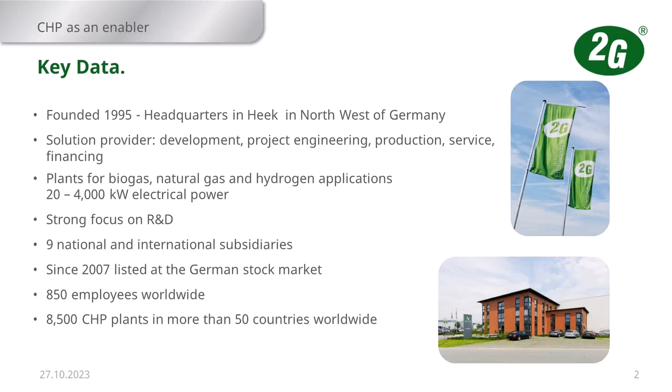The hydrogen engines - we're not ever saying that this is the be-all and end-all, that you've got to build a hydrogen engine and that's going to solve every single bit of the carbon infrastructure or the carbon problems you have. It just fits into a part of the overall strategy.

Building out PV nowadays is just so cheap, and now obviously onshore wind is going to get further along with the planning applications being dropped. We just see hydrogen fitting in as a part of the overall mix. Especially with the excess surplus of electricity, especially from wind farms at night, using that surplus electricity to generate hydrogen is obviously a way forward, rather than trying to build plants just to manufacture hydrogen, which is obviously a different set of mechanics and economics.

A lot of the projects we do over in Germany effectively use the electrolyzers to do grid balancing.

So 30% of all the wind turbines in the world have got to turn out the wind at night because obviously they can still generate power, but there's no demand for it. So rather than paying all the subsidy - I used to work for SSE, so I know about the subsidies that the government pays us to turn the wind turbines out.

In Germany, they use electrolyzers to do grid balancing. So rather than turning the wind turbines out, they make hydrogen. A lot of the projects we work on, we make hydrogen all throughout the night, and then we utilise it during the day. It's an energy vector, an energy storage medium. So rather than employing big batteries, use the excess surplus energy you've got at night to make hydrogen. That's it.

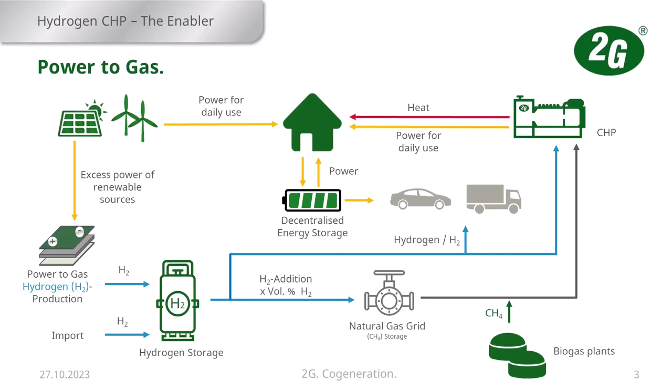So rather than storing electricity - yeah, I mean everything's weird depending on the regional subsidies and everything else. The municipalities in Germany are built so they're effectively their own energy supply companies, all the little villages and everything else. But down in Bavaria, they specifically target selling hydrogen to Greenpeace. So it's like everything - the last slides on this presentation are all about the economics. A lot of times, it's just economics. Cost is driven by money.

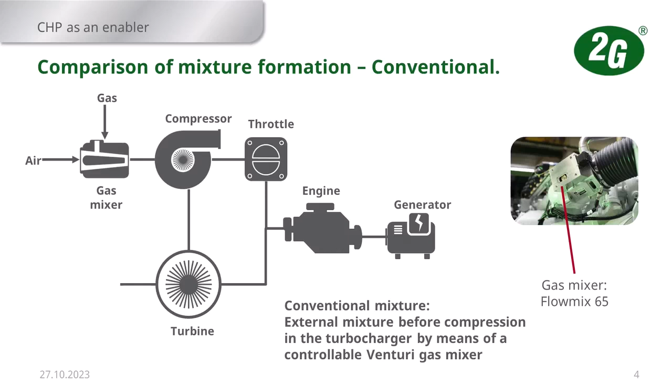So generally, in most standard engines, we use gas mixers. We have a gas mix where we do the formulation or the mixing of the gas in the air before we put it through the turbochargers. And the turbocharger then feeds that gas mixture into the engines. This is pretty much, apart from the non-aspirated engines, how all engines work.

For us, when we design engines, the basic core engine's effectively the same, depending on the gas and everything else that we're using. It's really just messing around with the compression ratios and the timing, and when we're doing the injection and when we're doing the spark effectively into the gas mixture. So we're normally used to playing around between biogases and natural gas, and conversely into hydrogen. It's just effectively getting that compression ratio right and the compression and the timing.

But also, we don't have flat cylinder heads - we have rounded cylinder heads, and we spent an awful lot of time, the research and development team, designing the cylinder heads, so that the combustion bowl is exact.

So this is why the efficiencies of the engines are so high. We spend an awful lot of time playing around with this. A lot of people will say, oh, you'll have flat heads. We don't, it's a slightly curved head, obviously, for that.

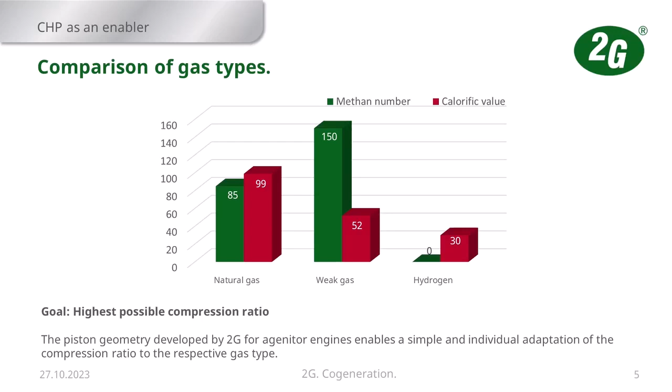For us, it's just a case of, we have the engines on the test cells, and we've got the engineers who know how to design and how to build them. So every time we need a different gas or a different structure, depending on the methane, or how much methane's in the biogas, we just play around with the compressions and the timing ratios of it. And effectively that's all it is. The actual core frame of the engine is exactly the same for all gas types, all gas structures.

Hydrogen is slightly weird, and it's got bad points and also an awful lot of great points. But in reality, our entire development of these hydrogen engines wasn't designed for hydrogen. Originally we were designing syngas engines, and a lot of the syngas structures had more than 50% hydrogen contained within the syngas. The problem with hydrogen is it's got a low detonation temperature, a lower ignition temperature, compared to natural gas and propane, which is just shown for a reference point.

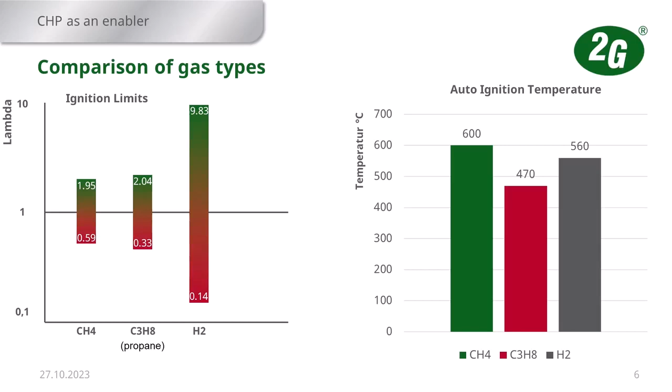Every time we're moving a gas mixture through a turbocharger, sometimes the turbochargers run at a couple hundred degrees centigrade. So when you're moving generally more than about 40-50% hydrogen through a turbocharger, you're getting pretty close to the auto ignition point of hydrogen. So originally, everything that we designed for syngas, or for these hydrogen engines, was based on the syngas. What we found is as soon as we were moving more than 40-50% hydrogen through the turbocharger, we would run the risk of blowing the turbochargers up because of the lower detonation temperature.

So originally, we designed it for the syngas. Rather than putting the gas mixture through the conventional way, we don't put the hydrogen, or we didn't put the syngas, through the gas mixing valve. We were still turbocharging the air, but we weren't putting the gas into it. Then all we were doing later on is putting an injection valve onto the engine, and we were injecting the hydrogen or syngas mixture back into the turbocharged air just in front of the cylinder head.

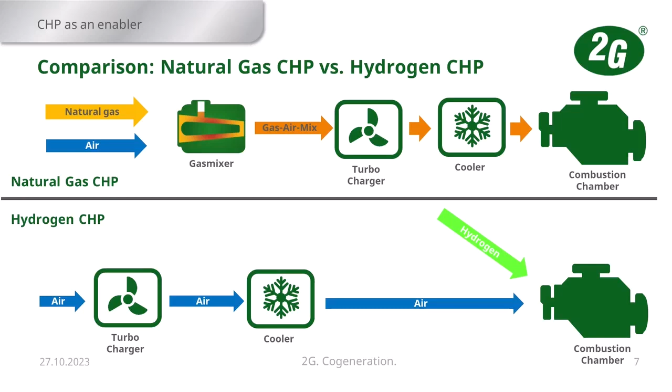So I said, we'd originally developed all of this for syngas, or for these 50% concentrations of syngas. That's all we actually do to the engine, it's just that injector valve. Then about 12 years ago, the German government were umming and ahhing whether to go for the hydrogen economy or whether to back the battery economy.

So they wanted a demonstration project to prove the concept of generating hydrogen from wind farms, low pressure, low temperature storage on site, and the injection back onto the gas grid. They wanted a project done to prove that all that sort of technology could work together. So obviously they came to us and asked if we could design a 100% hydrogen engine.

And in reality, all we did is we took the syngas engine running from 50% hydrogen, played around with the compression and the timing, and made it run on 100% hydrogen. In reality, it didn't take us that long to do. It was just a case of retuning and playing around with the compression and timing of it. And in essence, that's the only thing we add to an engine, an injector valve. Because once again, instead of the turbocharger, we just bypass it. We don't do anything else.

When we were originally doing our third series of engines, we also used to have to change the cylinder liner and the piston head, just so we didn't suffer from hydrogen embrittlement on the materials. When we moved to our fourth series of engine, a couple of years ago, our CEO made the decision, because the engine's lasting 15, 20 years, we know all the natural gas engines, at some point over that life, are going to be running on hydrogen. There's just no other way around it. So now every single engine has the cylinder liner and piston head with that hydrogen materials already specified on it. So now the only bit we actually have to add is that gas injector valve.

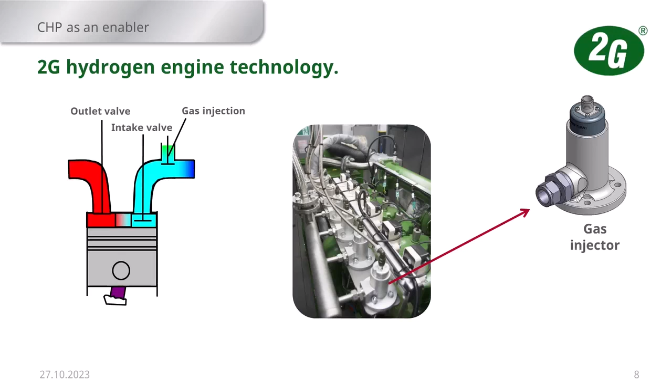So this was the original project - this is the actual engine that's in Berlin Airport. As you can see, at that point we didn't even bother taking the gas mixer off. All the hydrogen engines we sell now that are dedicated hydrogen engines, we don't bother putting the gas mixer on. But when we did the demonstration project for Berlin Airport, we still left the gas mixer on. So if we put the injection rail and the gas mixer on, that engine would run dual fuel - any combination of gases. But the gas mixer is never used because it's purely a hydrogen engine. All the dedicated hydrogen engines now don't have that gas mixer on, but it's just a leftover thing.

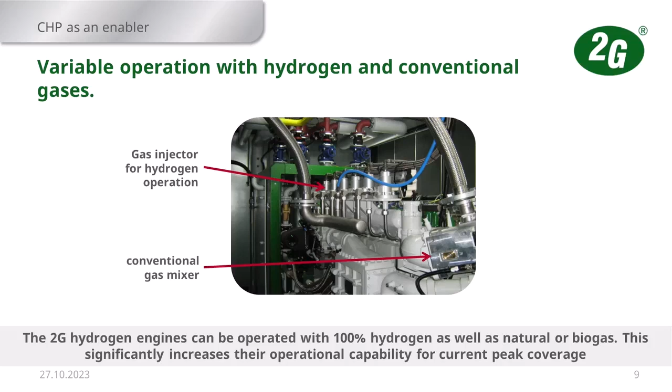The big advantage of this is we can make every single one of our engines run on 100% hydrogen. Because people think you've got to take the engine out, it'll be a new block, it'll be this - no, you put the hydrogen rail on it, that's it. So people aren't buying assets that will be dead if we do transition to a hydrogen economy or a gas network with hydrogen in it.

You get a bog standard engine - it's only because of the issue with the turbocharger at 40% blending that we start adding gas injectors. The normal natural gas engines, straight out of the factory without doing anything to them, will take 40% hydrogen, doing nothing to the engine at all. You could run a blend of 40% hydrogen and the engine doesn't care. It's only the turbocharger that has problems with higher concentrations of hydrogen. So the idea that we're only going to get 20% hydrogen in the gas grid - not an issue at all.

One of the other things we did as a company several years ago - the gas grid in the UK normally has a methane content of over 80. The only issue when you start blending hydrogen into natural gas is you lower the methane number of the gas. At 40% concentration, you're basically down to about 70-72% methane content compared to 80% as normal natural gas.

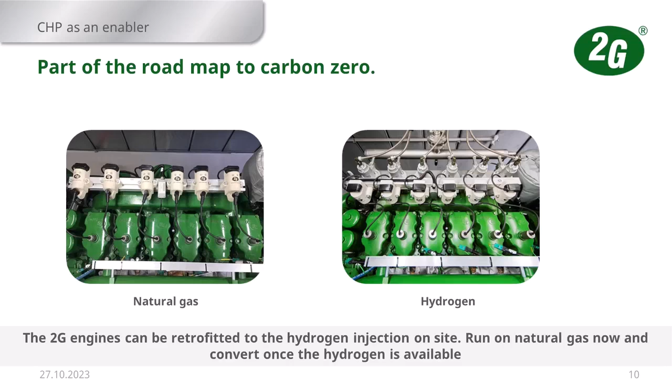One of the issues with hydrogen is the energy density. It's 3 times less energy density compared to natural gas, so we're shoving an awful lot more gas through the engine than we would through natural gas. We run at higher pressures - normally on the natural gas engine we're only running at a couple of hundred millibar, but when we're running hydrogen, we're running at 4 bar. So we shove hydrogen through that engine quickly.

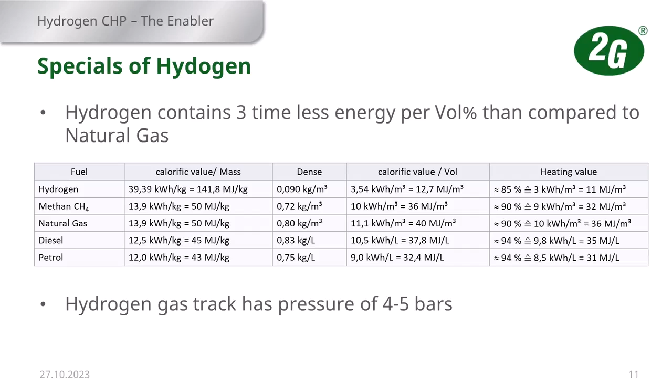It's all development work we've done already, so everyone now is playing catch up with us. We're open about all of this because we have a team of nerds who just design all these things constantly. Hydrogen has got some issues compared to other things we're working with, and energy density is one of them.

One of the great things about hydrogen is its combustibility. Normally with natural gas and everything else, we work on operational windows - there's a lot of gases you have to mix with air to get them to combust, but there's a limit to how much air you can inject and still get ignition within a spark plug, which is called the control window. With hydrogen, it's massive - it's got an absolute ginormous control window, so we can mix an awful lot of air in hydrogen and still make it go bang in the cylinder.

The reason this is really handy - when we first did the engine at Berlin Airport, we based it on the German biogas specification. When we designed an engine 12 years ago, we thought, what specifications should we pick? They chose the German biogas specification, which was 500 NOx. Since then, because of the corporate world going green, a lot of these engines are going to go into city centres, so the engine now all runs at 95 NOx. And we did nothing to the engine except increase the lambda value.

So what we did is shove more air into the hydrogen, and we still have it go bang, but by increasing the control window, increasing the airflow ratio of the gas, we lowered the NOx from 500 to 95, with no change of efficiency or power output of the engine at all whatsoever. We know we can go even lower - at the moment we're running about 3.4 on the lambda value, and we know we can get down to 5 or 6. The problem is when we start hitting these numbers, we start eating into the power output of the engine. But we know we can actually run the engines down to 30 NOx.

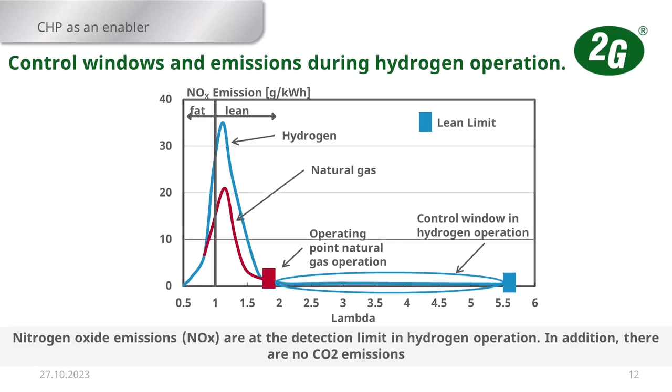So I said, for us, hydrogen's wonderful as a fuel. And once again, our entire range, all of them, we have running on hydrogen, so our 4-cylinder all the way up to our 20-cylinder. We've also recently just launched our 16-cylinder as well, that fits in the middle of that.

But the efficiencies and everything else, they're all the same as they are on natural gas. The only thing at the moment, well, not the actual efficiencies, but the power outputs - at the moment, because we've only got 26 hydrogen projects working all over the world.

So at the moment, when we're running engines on 100% hydrogen, we derate the engine 25%. The reason we're doing it specifically is hydrogen's got no knock resistance, so it's easy to get early detonation if you get the combustion and compression ratios wrong in the engine. Because we've only got 26 projects working all over the world, we want to make sure there's no issues on those engines at all, so we derate the engine 25%.

So that's why, on our 420, which is our 20-cylinder engine, when we run that on natural gas, we run that at 1 megawatt.

But we specifically made this decision because at the moment, up until the next couple of months when we're doing the testing of the engines, we're still using bottled hydrogen in the factory. So we haven't got the engines on test 24 hours a day. But we're going to be on the hydrogen backbone that's going through Germany - our factory's going to connect to it. So as soon as our factory's on it, we're going to get the engines on test 24 hours a day.

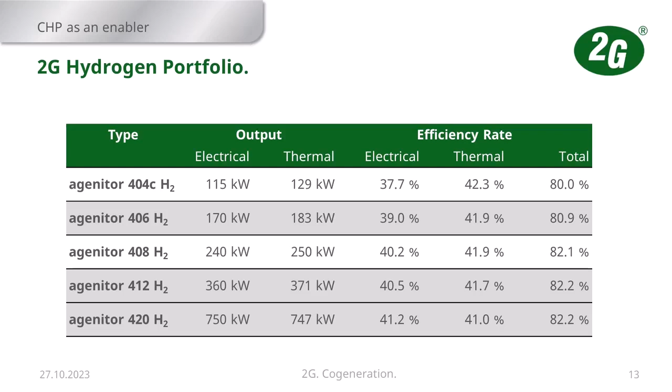What do people do with the heat? Is that a bit of a cheat, saying you get half of the engine?

No, I'll show you one of the examples. Because this is what we build - we're a CHP company, combined heat and power. So obviously we do what we class as low grade, it's 100 degrees.

When we, as a company, are targeting industries, the best industries to work in is the food industry, because they have high steam demand, high low temperature water demand, obviously for washdowns and everything else, high electrical demand, and generally they run 24 hours a day.

Every hospital has got a CHP. Every university's got a CHP. Anybody's got high thermal base loads or high heat loads, like swimming pools, hospitals, those types. Yeah, absolutely. Well, we did the world's first district heating, you'll see that in a minute as well. But yeah, everything's got high heat load, high electrical load.

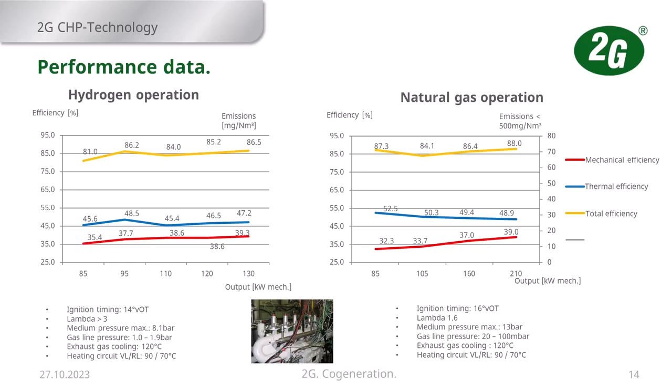So once again, I said, we spend an awful lot of time doing this sort of research and testing and everything else. And obviously we have a lot of universities come down and witness all the testing, because pretty much we're the only people that go running the engines. So obviously a lot of the universities in Germany have got high interest in everything that we're doing. But yeah, so I said for us, hydrogen's just wonderful as a gas.

I said most of these, I've got the case studies in a minute. Kirkwall Airport was the first one in the UK. That's got the ITM electrolyser on Eday. And Toyota have got them at their main manufacturing sites over in Japan.

I mean, the most interesting one that we've done recently is over in Taiwan, at one of the semiconductor factories. The byproduct of the semiconductor factories, they're reprocessing, and the reprocessing of the waste produces 99% purity hydrogen. So it goes straight into our engines, and the case study on that is fantastic. And there's a lot of people watching that now. But yeah, so we've got them everywhere.

I said this isn't something that we've just got on the whiteboard, saying well, this is what we're going to do in the future, this is what could be done. We take people to see these. And the crazy one is, I said, the one in the UK, which is Kirkwall - it's actually always quicker.

We take everybody to see Apex over in Germany, because it's actually quicker to fly into Germany than it is to get to Kirkwall Airport. I keep trying to convince people to come see the one over in Dubai, but so far no one's taking me up on that. The one in Dubai works absolutely sweetly. I've seen the one in Germany God knows how many times. But I must admit, the gin distillery up in Orkney is fantastic. It's just an absolute pain to get up there.

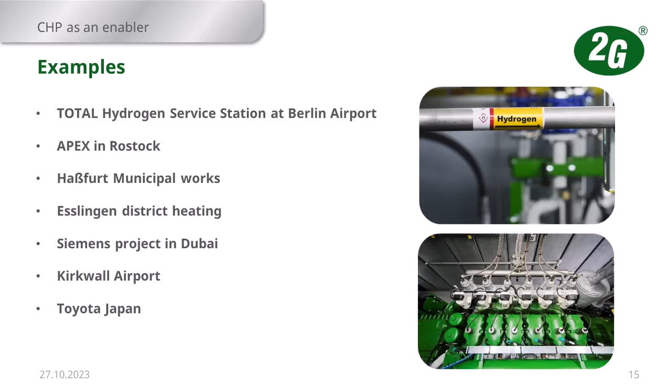So this was the first one that we did. This is the German government project, which we did with Total. It was effectively just to demonstrate everything, obviously for the wind farms, through the electrolyzers. All of the vehicles on the airport were obviously hydrogen fuel cells. It was to test the hydrogen injection back onto it, low pressure, low temperature hydrogen storage. It was a complete joining of stuff together just to prove it could all work together. We just did a little bit, which was obviously the first engine in the middle of it. But it was a nice project.

But Berlin Airport's also quite a funny story if you want to go kicking the Germans, because they always pride themselves on their engineering prowess and everything else. The airport's not built so you can land - the runway's not built so you can land planes on it. So the airport hasn't opened. So if you ever know Germans, ask them why haven't you landed planes at Berlin Airport. They go... so yeah, they were great at building all of that. They're great at building the structure. They got a load of idiots in to build the runway, so you can't land planes on it.

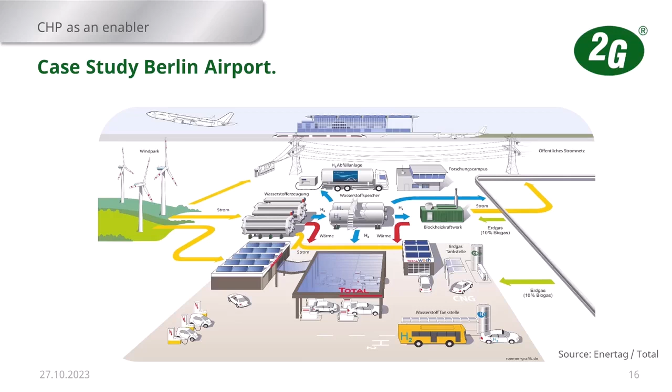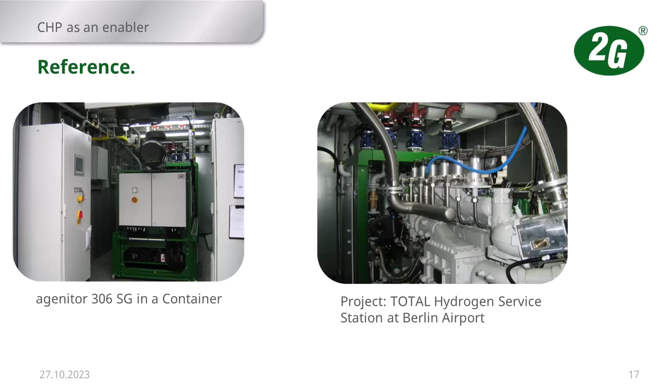But there you go, so this is the first engine. So once again, I showed you that before. These are existing projects - this ain't what we made up. That was when we were on our third series of engines. We're on the fourth series now, but that was the world's first hydrogen CHP.

This is the project over in Dubai. It's quite funny as well - a lot of my friends work in Siemens, and this is obviously the board of Siemens. So in the Siemens brochure you see the main board all the way over here, and there's a sticker there because they put it over our engine. But obviously that was connected to the world's biggest PV farm, so it's slightly different from the other ones that we work with.

So all the ones we have connected to wind farms, we generate hydrogen during the night, we use it during the day. That one generates so much hydrogen during the day, it runs 24 hours a day. But we also have that running on a trigen system. That project was done for the World Expo, so the World Expo also had the Hydrogen Expo next to it. We provided all of the power for the Hydrogen Expo bit. It was a project we did in collaboration with Siemens - that's a 0.5 megawatt engine, Siemens electrolyzers and everything else on it. But that was a great project.

Once again, it was purely and utterly to demonstrate that all this technology can work together, because the Middle East at the moment are going mad for hydrogen. They can see there's going to be an end at some point to the oil industry - whether it's 20, 30 years, whatever - but they've got an entire industry set up for transporting gases around the world. It'll be converted into ammonia because it's easier to ship, due to the energy density. At the moment they're covering the deserts in PV, and that's all you need - renewable power, PV, wind, water - you can make hydrogen. Morocco and those type of places are going mad for hydrogen generation. Australia is going to be covered completely with PV, and they're going to sell all their hydrogen into Japan. It's changing the economics - a place like Morocco has no natural resources, but they've got sunshine, they've got water, and they're 8 miles from Spain. It makes sense - you can all of a sudden become a power in the world industry by having no natural resources.

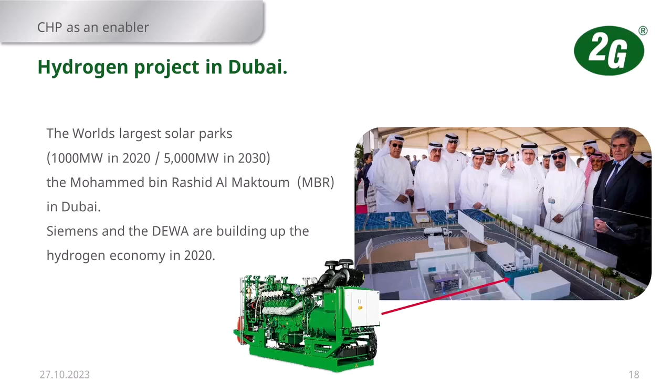So once again, that was just the simple overview. This is the only hydrogen engine that we've got that actually runs tri-generation. We've got an absorption cooler on it because the last thing they needed over in Dubai was more heat, but having cooling was quite handy. So we put an absorption cooler on it - we produce electricity and we produce cooling.

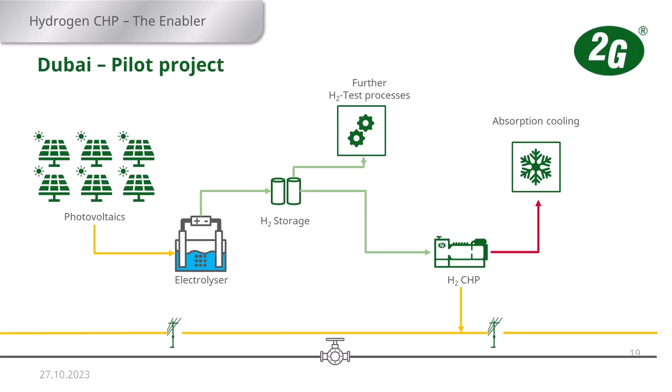If you don't know how absorption coolers work, that'll give you a headache on how you can produce cooling out of heat. But I'll give you that headache a different time.

So this is the project down in Bavaria. This is the Haßfurt Energy Centre, the one that sells green gas and hydrogen. Once again, it's another Siemens electrolyser. We'd already had the natural gas engines on there, filling the school, the swimming pools, and all those types of things.

Because of the way municipalities work in Germany, they have their own little energy companies - like our DNOs, but there are hundreds of them, as each region becomes effectively its own DNO. They built out so much onshore wind that they ended up with 200% of the electricity they needed, which at night was causing an awful lot of problems.

So they put the Siemens electrolyser on purely for grid balancing, but the benefit was they were generating hydrogen. They sell it to Greenpeace and run it through the engine, and if they've sold all the gas or haven't produced enough hydrogen, it runs on natural gas. That's the great flexibility of the engine - once you've got those injector valves on it, it'll run on anything: pure natural gas, pure hydrogen, or any combination of mixed gases in between.

The mixed gases are also quite strange, because one of the projects we do over in Japan is a greenhouse. We can't run the greenhouse engine on 100% hydrogen because the greenhouses want the CO2 for growing. So we have a dedicated blending valve that bleeds exact amounts of natural gas into the hydrogen - it's the other way around. They have pure hydrogen and blend in natural gas rather than having natural gas and blending in hydrogen, to produce CO2 out the back end.

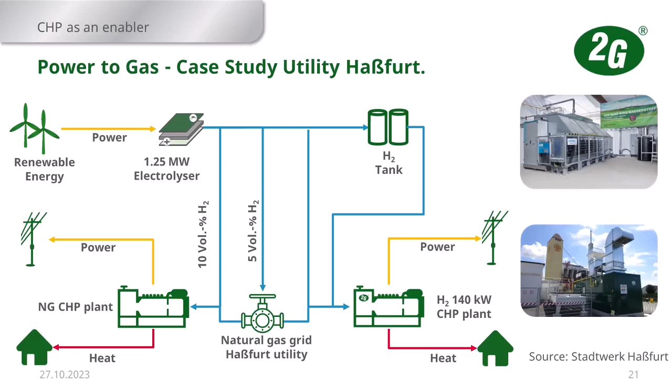This is how all this idea of district heating schemes being carbon zero works - simple, just change the fuel, whack an injector on the engine, there you go. You've got all the infrastructure already in place, so why bother ripping it all out? Just change the fuel into the engine. It's the argument and discussion we have at the NHS all the time - they've got the engines already.

We sell heat pumps, so we're getting into the throes of it - they're saying, oh, we want heat pumps, we want this, that, and the other. I'm thinking, why? We're going to have to rip out all your infrastructure and put a whole load of new infrastructure in, when you've got the infrastructure in the engines there already - just put hydrogen into it. There you go, you don't have to buy any more equipment, just a couple of valves and get hydrogen. So why buy an entire new project and new infrastructure? Just use what you've got, just change the gas - it's not hard. There are thousands of these things that exist already anyway. Why throw something away that's working? Just change the gas. The gas is the problem, and the gas is the easy thing to solve.

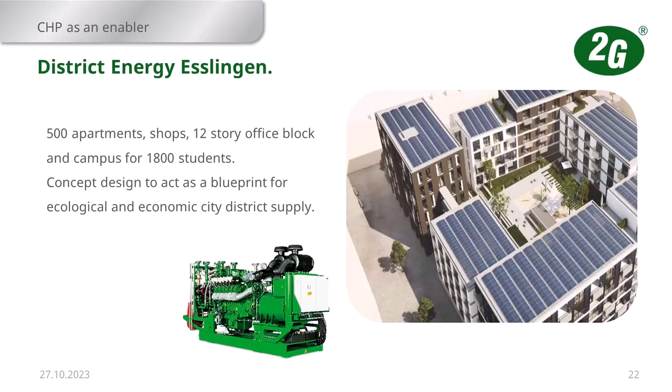So once again, it's just a complete district heating scheme. We have some heat pumps on there as well - we designed it that way from the start. This was obviously the project that we did up in Orkney.

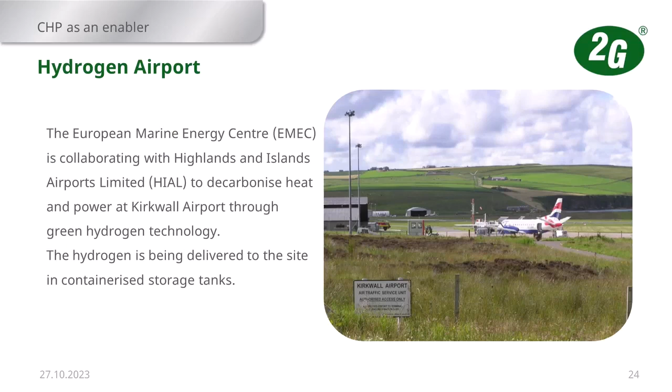We did this as part of the European Marine Energy Centre. This was the weird one, because it's the only project where the hydrogen's actually delivered to site. In every other project we have the electrolyser effectively next door, with a hydrogen storage tank that feeds into the engine.

The hydrogen for this is actually produced on a different island. There's an ITM electrolyser over on Eday, and the reason it's there is the interconnector back to the Scottish mainland is rubbish. It's owned by SSE, who I used to work for. That's where they do all the tidal testing of the turbines, and because the interconnector is so bad, they wanted more and more tidal turbine testing done, but needed a use for the electricity since they couldn't get rid of it to Scotland. So they stuck an electrolyser on it for the tidal turbine testing, and then they were over-generating hydrogen.

But yeah, it's a nice, simple project. It's a sod to get to, but it's a great looking project. Guy Martin was there with Channel 4 about 6 months ago, so once again, great when you get free publicity on Channel 4.

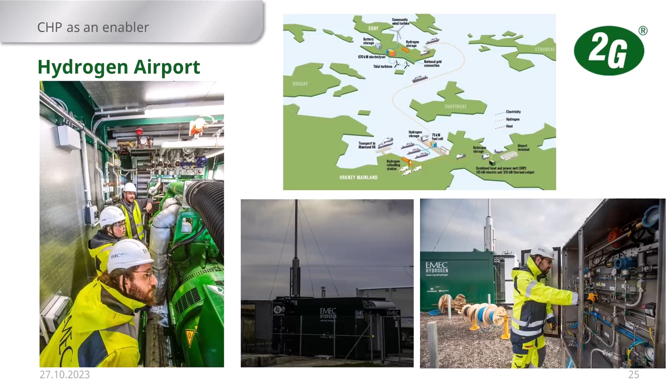The other great thing - hydrogen's got great advantages because it's such a clean fuel, it runs really, really sweet. Years ago, service maintenance on an engine used to be 1,000 hours, always based on spark plug life. Spark plugs now last 4,000 hours. So our service intervals now are based on when we have to change the oil, roughly every 2,000 hours, because hydrogen's got no carbon content, so the oil stays cleaner and the service interval gets longer.

So the idea we're working on now is to try and get the oil change back up to 4,000 hours, matching the spark plug interval. That increases operational availability and makes it cheaper to run since you're not replacing oil all the time. That's why I said hydrogen's got an awful lot of advantages to it - rather than just the carbon thing, it's because it's a pure, clean gas. So for us, we love it.

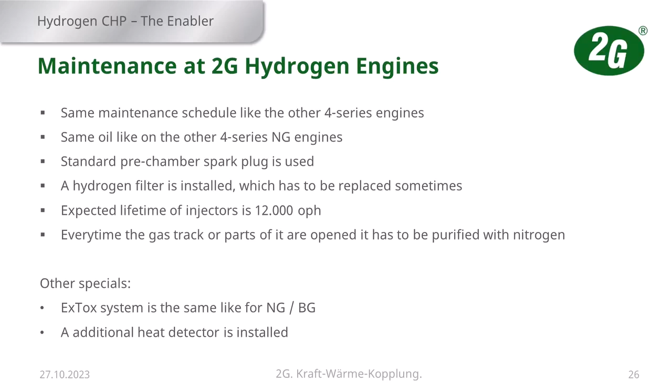So this is the problem - cost, and there isn't any. Everything comes down to cash at the end of the day. At the moment, levelised cost of hydrogen based on S&P is about 12p a kilowatt, which compared to some people paying 6p at the moment for normal gas, isn't too bad, but it's still economic death.

But it's going to come down with subsidies. Over in America at the moment, they've got a $3 a kilogram subsidy, trying to levelise the cost down to $1 a kilogram, which is 1.8p a kilowatt. The European Hydrogen Investment Bank is trying to do a €3 subsidy as well, with the idea of bringing it down to €1 a kilogram.

But we had the CFDs - we might be giving people threepence. So our subsidies are actually rubbish compared to what the rest of the world's running. The Dutch have done theirs based on carbon abatement - they gave 1,980 quid a tonne on CO2 abatement from hydrogen, which really, really changes things.

So once again, this is the big problem. If it was the same cost and you could get it like natural gas, every single one of our customers would switch instantly tomorrow. The problem is, you can't get it, and if you can get it, it's too expensive. That is the be-all and end-all of the problem - getting it, and the price. At the moment in the UK, we're getting left behind.

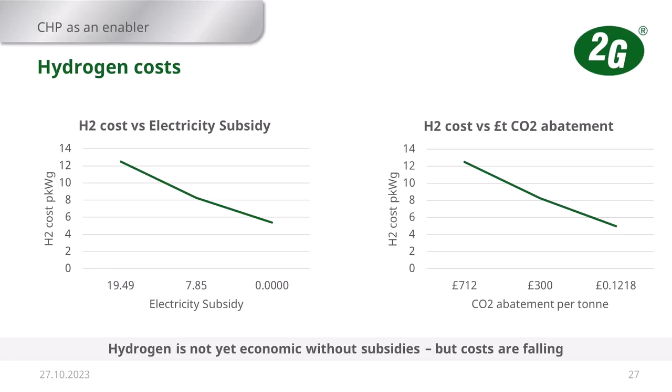There's going to be a point in time when the economics will work to switch it over. Given the engines will last 15 years, at some point over that time the economy is going to change. If the Europeans start producing hydrogen at the price they want, there's gas pipes from Europe, they'll just ship it that way. So if we don't start pulling our finger out and incentivising hydrogen generation in the UK, we'll end up importing European hydrogen.

The Middle East is gearing up to export ammonia, because it's easier. All the marine engine companies are now designing their marine propulsion engines to work on ammonia, because transporting ammonia is the greatest thing ever. It's got ultra high energy density. The big problem we've got in the UK at the moment is we're lacking in nitrogen, for fertiliser. Ammonia is the answer for everything.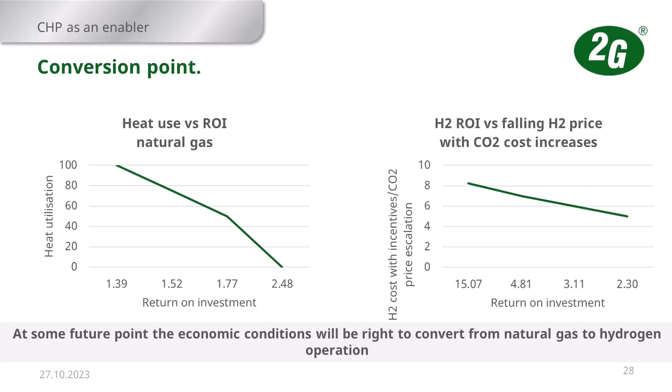It's what a lot of the work we're doing with Centrica is about. You import the ammonia, you split it back down into the two things you want, hydrogen and nitrogen. The Middle East is gearing up for that, and we are getting left behind. If we don't start making it in the UK, we're just going to end up importing it from other people who are doing it cheaply.

CO2 reductions - this is another thing people get confused about. People think if we get our gas grid to 20% hydrogen, that means a 20% carbon reduction. Well we don't, because of the different energy densities of hydrogen compared to natural gas - hydrogen's only got a third of the energy content. A pint of hydrogen's not worth the same as a pint of natural gas. So if we get to a 20% hydrogen blend in the gas grid, it's only an 8% carbon reduction. It's not until you get into the higher percentages - 80, 90, 100% - that you really start getting the CO2 benefit.

A lot of people think if we get 20% hydrogen in the gas grid, 20% of their carbon problem has disappeared. No - it's 8% carbon reduction. We're realistic, we tell people the truth. This is the truth: 20% hydrogen is only giving you an 8% carbon reduction. This can be proved in any way you want.

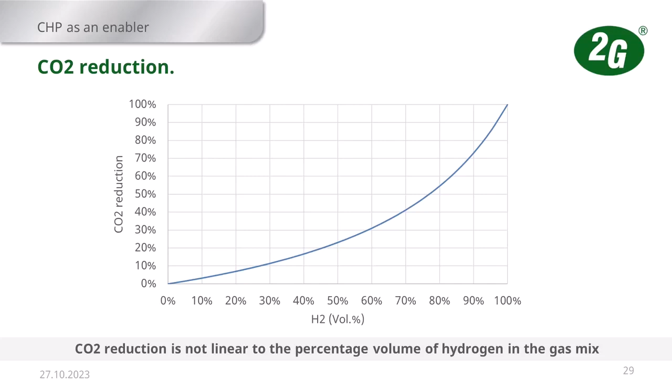So the main conclusion really is purity. A lot of our competitors in a certain way are the fuel cells. Fuel cells need 5 nines purity - you need 99.999% purity of hydrogen. To get that out of an electrolyser, you effectively need a cryogenic unit on the back end to get that high purity.

Our engines don't care. We don't care about the purity. We can run with gas impurities - it's an engine, it's designed to run with nasty things. Because we don't need high purity, a standard electrolyser without all the fancy stuff on the end produces 97% purity - perfect for us. We can take hydrogen as a byproduct from the chemical industry, as long as it hasn't got siloxanes or things like that in it. Simple. This is the massive advantage of engines.

We can take impurities, but also engines are designed to go up and down - we do load following, it's not a problem. Fuel cells want a full, constant load day in, day out. They don't want to fluctuate, otherwise the cells crack. So there's an awful lot of reasons why engines are better than fuel cells.

At the moment, some of my mates work at Bosch and they reckon they're going to crack the purity thing and get it working with impurities, but at the moment that's not the situation - they need 5 nines purity. Even gas networks - if you got to a complete gas network, once it comes out the pipe it ain't still at 99.999% purity. It's picked up something nasty along the way.

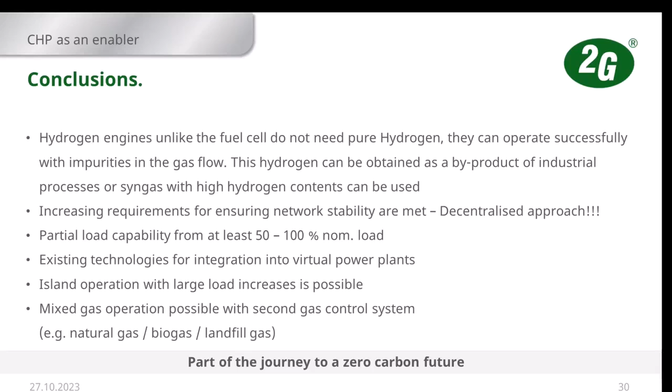Engines don't care. And once again, with virtual power plants and island moding, it's a bog standard engine - it's just a different gas. That's it, simple. Not hard, is it? It's nothing different - it's an internal combustion engine that we've made run on hydrogen. So the problem is getting the hydrogen. There you go, simple.